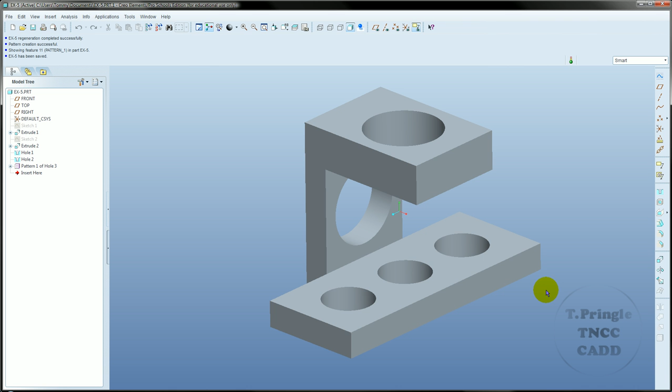The purpose of this video is to discuss the drawing process that's going to be used for exercise 5. This one's slightly more difficult because there's a lot of features, but again, it starts the exact same way.

New drawing, give it my name, say OK. A size drawing, and OK. And what this is going to do is bring in some different views here.

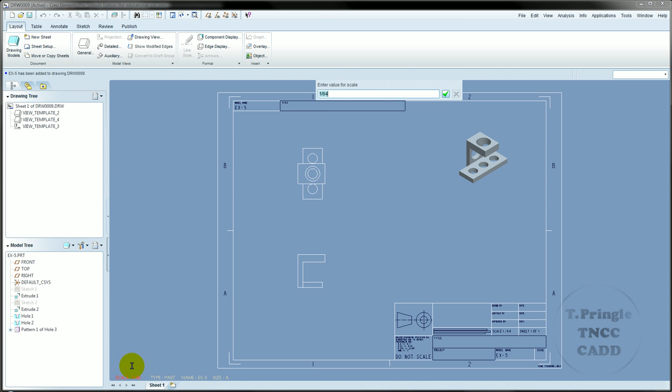Now these views are pretty small and it's going to be a little bit hard to work with. So what I'm going to do is come down here and double click where it says scale 1/64th, and change that to a 32nd. That should double the size of all of my views, which will make life a little bit easier as I'm trying to get in here and put in all of my dimensions.

But what I can see now is that this sheet might actually be a little bit small for what I'm trying to do. So it's going to be tight as far as dimensions are concerned, and I may not necessarily be able to get all the dimensions on that I need.

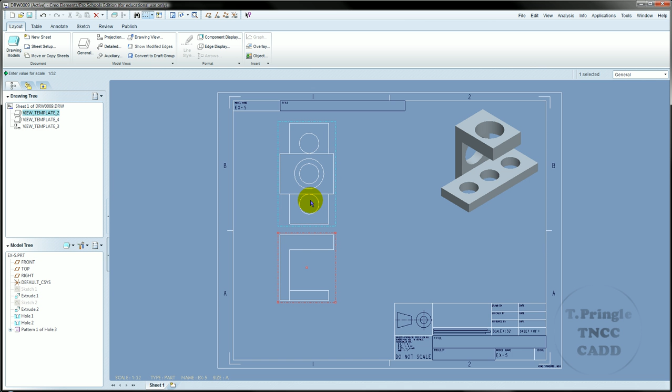So at this point, not having done a whole lot of work, it's not a big deal if I come up here and say window close and go right back to my original file, go to new drawing, give it my name, say OK, and say B-sized drawing instead of A-sized drawing.

The beauty of being able to do this stuff using an electronic format is you'd never have to worry about doing a whole bunch of work only to find that it doesn't fit.

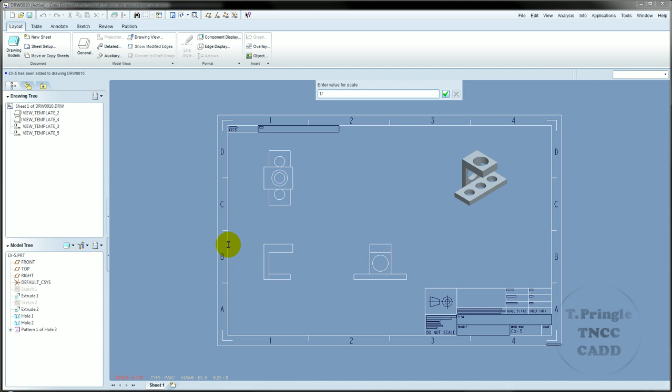And again, I'm going to come down here to my scale and make that 1/32. So now I can see I've got all three of my views in place, plus my isometric view, and from here I can begin to actually do all of my dimensioning.

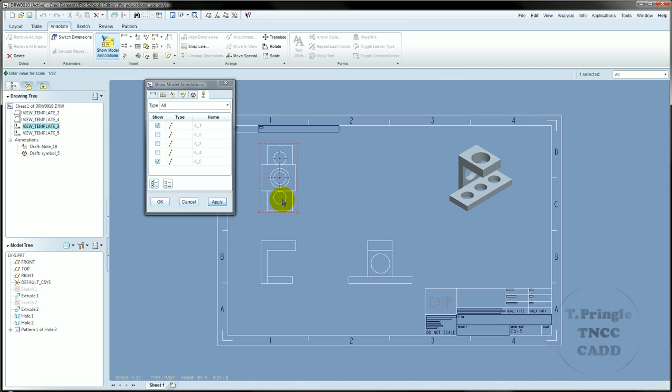Just like I did with the previous drawing though, what I'm going to do is left click on this view, and under my annotate tab I'm going to go to show model annotations, and bring in each of those center lines so that I have them in this view.

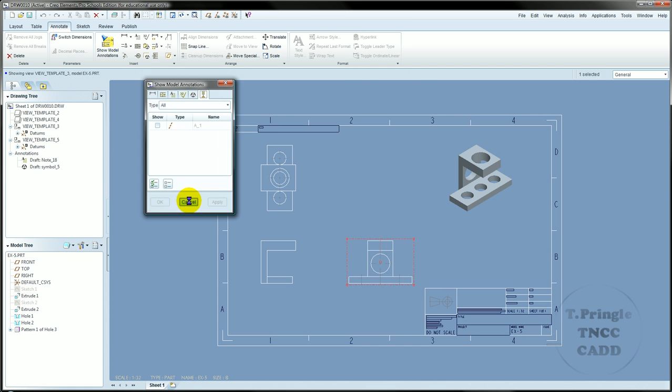I'll apply that, come over to this view, show model annotations, bring in that center line, and you can bring in the center lines for the other ones, but really it's not going to be that important because we don't necessarily want to dimension to those in that view anyway.

I've got a lot of information to put into this top view, so what I'm going to do is start with the smallest dimension I have. By starting with the smallest dimension, it's going to make it easier in the long run to continue adding dimensions further out.

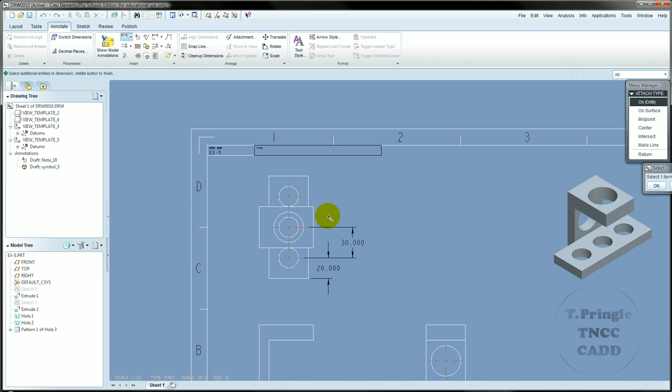And then we'll go from this one to this one - there's 30. This one to this one, that is 20, and in this case I'm going to go ahead and stagger these a little bit just so that I can get all the information that I need in here.

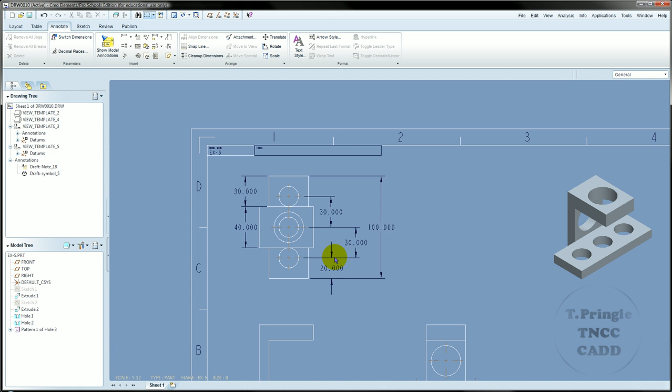Okay, so what you can see is rather than leaving it up for the assumption that everything is centered, I've gone ahead and made it so that it really has a dimension defining the fact that this is centered between here. Now I've got most of my dimensions this way now covered just based on doing those two views.

So what I want to do is create a couple of additional dimensions down here so that I can get more information. This is going to be a dimension of 40 right here. This one is 55, this is 15, this is 10.

Now, I've been using a lot of the room that I have, but I've gotten a lot of the stuff dimensioned that I need to have dimensioned. So the only other dimension that I necessarily need in here for right now is a dimension between here and here, which is going to be 10. It doesn't really matter if my dimensions are on the inside or outside, but as a general rule, I'll move it to the outside.

Next, I'm going to come back up to dimension, and I'm going to grab this line right here with a double click and have that say diameter 20. Now I'm going to double click this, or slow right click on it, and say edit attachment—I'm sorry, not edit attachment, properties.

In the properties I can do anything that I need to do as far as display. You can see here it has diameter at D, and all I want to do is after that come in here and add the word '3 holes.' I'll say OK, and what that does is make it so I do not have to go through and do anything fancy.

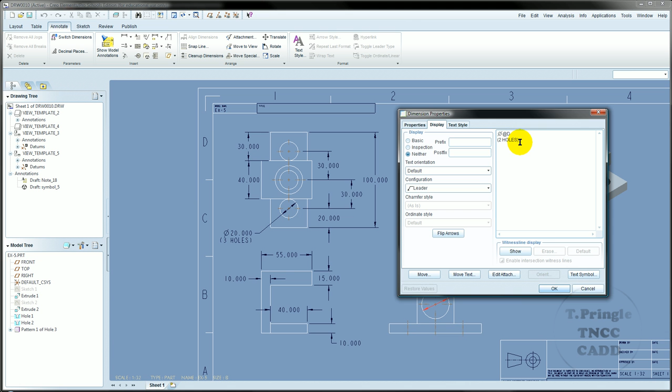Again, I'm going to come in here and go to Properties, Display, and change this to 2 holes. We'll say OK to that. Now I know there are 2 holes that are being defined on this particular piece.

Go back to my dimension command. Dimension from here to here is 20. Overall height from here to here is 40.

If I want, I can try to find a place to squeeze in another dimension over here for this edge to here, or I can go from this back edge to this point right here. But that's going to have a lot of my lines crossing. So in this case, it may be a good idea to either eliminate the need for that dimension completely, or allow the math to work out and figure out how big this is based on the dimensional values I already have here and here.

You could figure out exactly what the placement of that hole is, even though it's on top as opposed to on the bottom. So now with all the dimensions in place, the only dimension that I'm missing so far is an overall height dimension, which I'll go ahead and place.

So here we've got our 65, and I'll just move that so that it's a little bit easier to see what's going on here. Now everything is dimensioned, everything has its values.

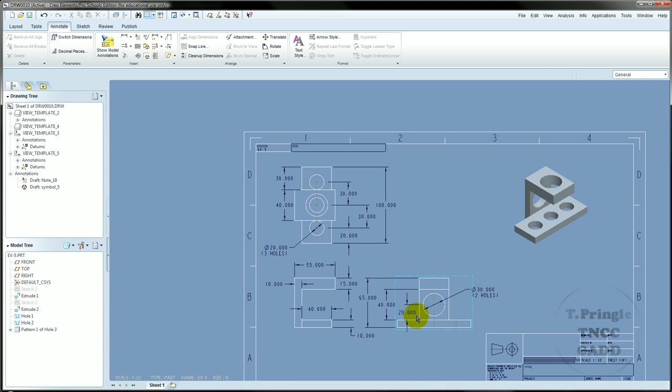So in this video, we've retrieved dimensions from the model. We've changed from the default A size sheet to a B size sheet so that we have enough room, and we've dimensioned everything. Now, when I go to Publish and select PDF and Export, as soon as I save this to my desktop, you'll notice that the PDF file is also a B-sized PDF. You don't have to go through and change any of the settings—it's going to be picked up automatically.